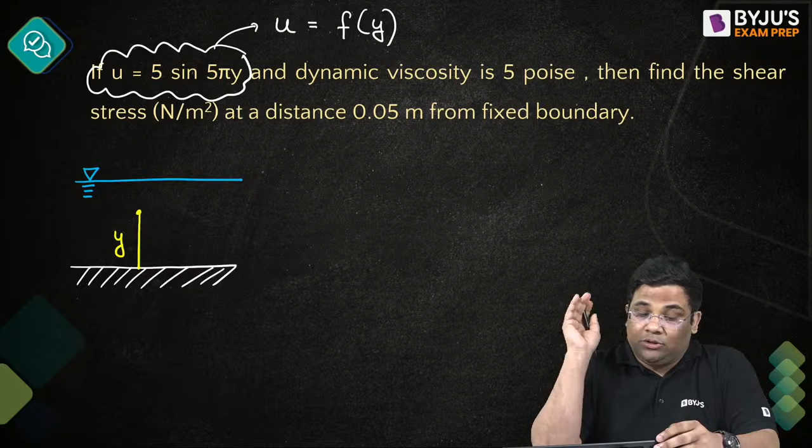Let us start the question. So this is the first question. U is given, meaning the velocity equation is given, and U is a function of Y. If we have a fixed boundary like this, and there is fluid motion, we are seeing the velocity at a distance Y from this fixed boundary. So Y is the distance from the fixed boundary, and the velocity is a function of this - that particular velocity profile is given. The dynamic viscosity is given as 5 poise. Then we need the shear stress at a distance of 0.05 meter from the fixed boundary.

If the concept is not clear, there are many lectures which are conducted covering this concept already. You can refer to those lectures and then come back to solve these questions.

So Y is equal to 0.05 meter, this Y is given. They are asking for the shear stress. Now what is the equation of shear stress? The equation of shear stress is dynamic viscosity into du by dy. This is the Newtonian law of viscosity. And this U equation is known as the velocity profile. Now the velocity gradient - the profile is already given, so we can find this velocity gradient.

How do we find it? We differentiate du by dy. This is the equation of U, so if I differentiate it, 5 is already there, then I'll differentiate the sine term. The differentiation of sine term is cos term. So this will become 5 cos(5 pi y), and the 5 pi will also appear here - that is the rule of differentiation. This will be du by dy. Now here I'll put y equal to 0.05.

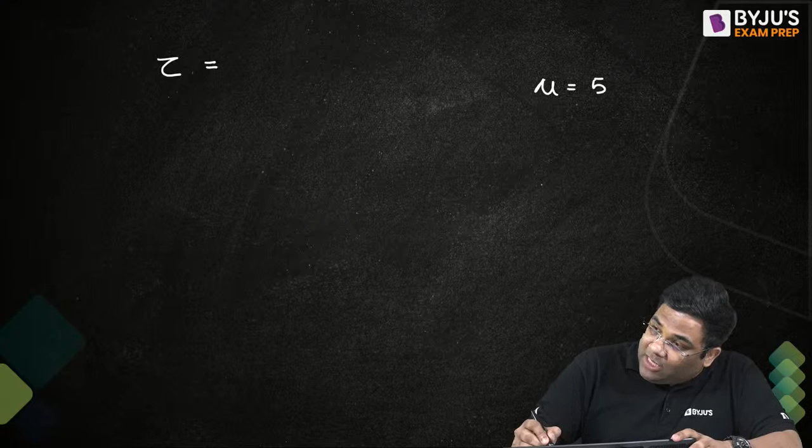The shear stress will be equal to the dynamic viscosity, how much? 5 poise. Now see, 5 poise is how much? If we convert into standard units, it is 0.5 Newton second per meter square. Remember this, that 1 poise is 0.1 Newton second per meter square.

Very good. So this is 0.5, and the velocity profile, how much we got? 25, gradient 25 pi by root 2. Yes, so I can solve this and get the shear stress value, right? Let me solve this: 25 into pi into 0.5 divided by root 2. I'm getting...

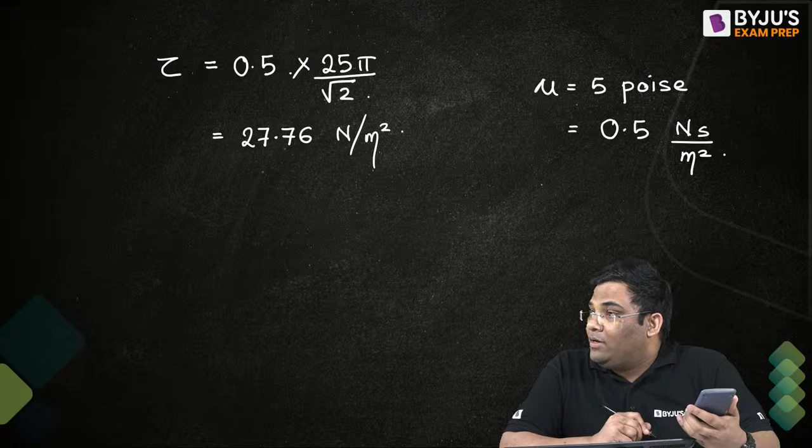27.76 Newton per meter square. So yes, Nikki has got 27.75. Some other students solved, but somehow some mistake happened. That is fine, you are learning, no problem. Yes, so we understood how to solve this question.

So in this GATE examination, this is a very standard question. What they will give? They will give you the function of u. Yes, so if they give the function of u, you can always find out du by dy. See, here it is a trigonometric function, it can be an exponential function, it can be an algebraic function, right? Any function they will give. So you can always differentiate it and put the value of y given.

Now once you find this, the shear stress will be simply dynamic viscosity into du by dy. Okay.

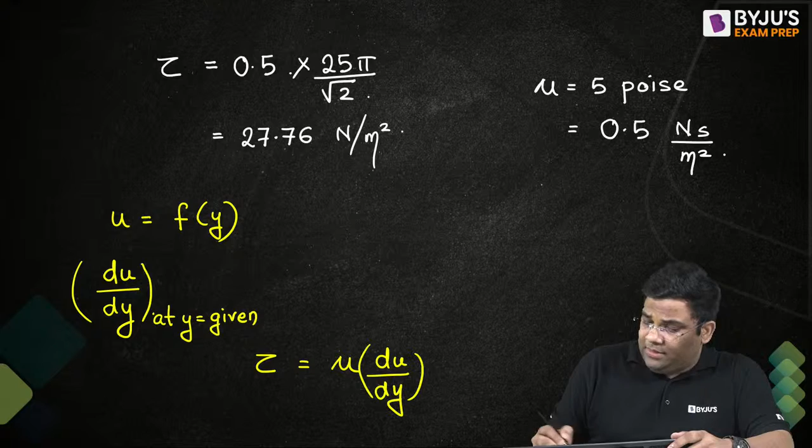Okay, so first question is over. Let us go to second question. Okay, the second question is from viscosity only. This is from viscosity. It's a standard question which they ask a lot.

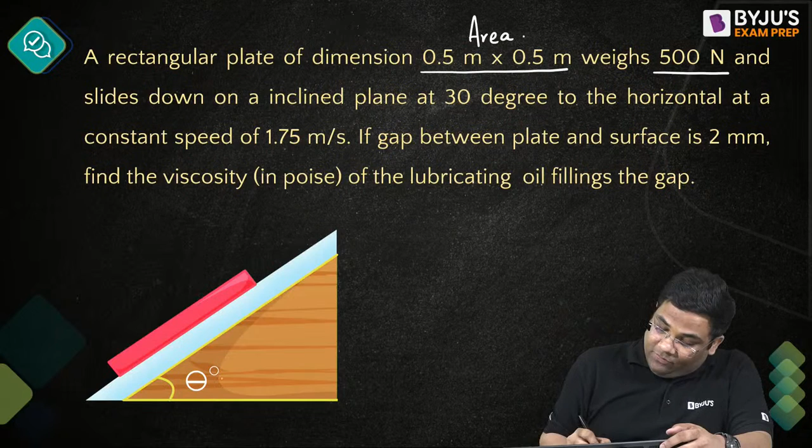So a rectangular plate is there. The dimensions are given, this means this is the area, right? Then the weight is given. And also it is on an inclined plane making 30 degree to the horizontal. And the particular plate is sliding down with a particular velocity.

That velocity is given as 1.75 meter per second. Now this particular gap, yes, there is a gap because there is a fluid. On this particular inclined plane, there is a fluid, and on top of that, there is a plate. Now this gap is filled with a fluid, we can say like that. It is 2 mm, and here this fluid is an oil.

It's an oil, and this oil will have a particular viscosity mu. We don't know, that is not given, but we can find out, and that is what is asked here. Now what is the theory behind it? Let us put some light on what's the theory behind it.

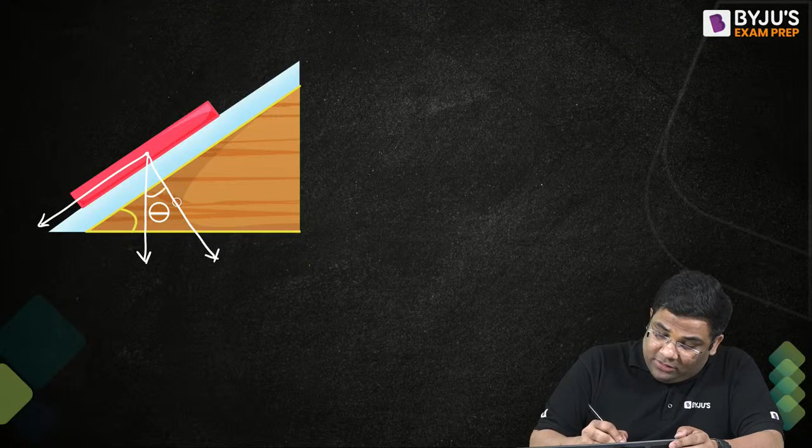Now, if this particular plate is sliding down, why is it sliding down? Because there is weight, yes, and there will be weight components. If this is theta, this is also theta. And I can say if this is W, the weight, this will be W cos theta, and this will be W sin theta. So due to this particular weight component, this particular plate will slide down at a velocity v.

At a velocity v. Now we know that the Newtonian equation of shear stress is: shear stress is equal to mu into du by dy.

Du by dy. So what is du by dy? Du by dy is equal to the change in...

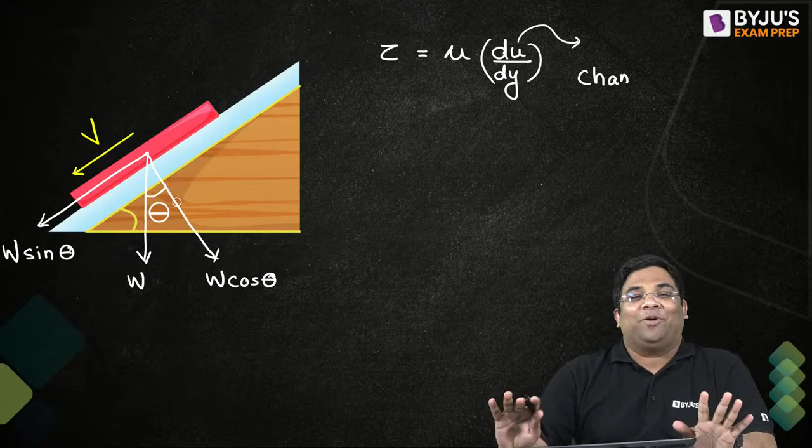Sir, are you using a tablet or laptop to draw diagrams? How does it matter to you? You have come to see whether I am using a tablet or laptop. How does it matter? You are here to investigate that, or you are here to learn the lesson.

So this is change in velocity by change in distance. This is change in velocity by change in distance. Yes, dy is change in distance, du is change in velocity, right?

Now see, if you see a fluid particle here, it is attached to the plate. So it will be moving also at speed v, because it is attached to the plate.

Now a particular fluid particle which is here, attached to the inclined surface, that inclined surface is at rest. So the fluid particle there will have velocity 0. So here the fluid particle has velocity v, and at the other point velocity 0. So the change in velocity is v minus 0.

Now change in distance is how much? Change in distance is this one, right? Suppose I call it h. So change in distance is h, right? So dy is equal to h only.

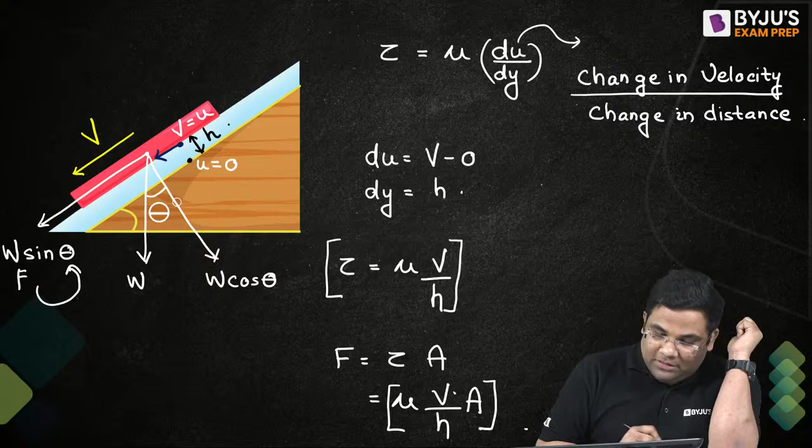So I can say the expression is: the force w sine theta, which is responsible for movement of this particular plate, I will equate to shear stress into area, that is mu into v by h into area.

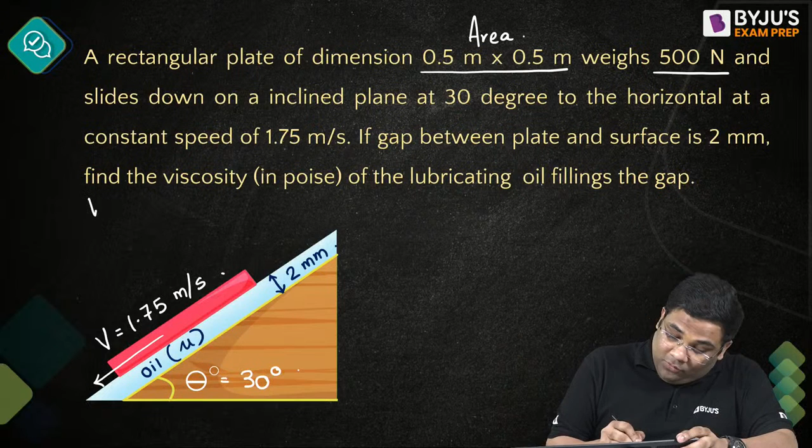Now we'll use this expression and I will solve this question. So w sine theta will be equal to mu v by h into area. See, area is 0.5 into 0.5, that is 0.25 meter square, this is your area. This is velocity of the plate given.

Now h, the gap is given how much? 2 mm. This is h. So I'll convert into meter. So 2 into 10 power minus 3 meter.

Everything I'm converting into meter. Now W is also given, 500 Newton. So this is W, right?

So if you put all these values, can you give me the value of mu now? Put all these values and give me the value of mu. Solve this.

And since everything is in standard units, I'll get the value of mu in Newton second per meter square. So put these values. From here I can say mu will be W sine theta into H by V into A.

So put all these values and give me the value of mu. Let me see who is solving first.

1.1114... 1.114 you are getting, very good. So you are getting 1.143, I can say, right? 1.143 you are getting. Okay.

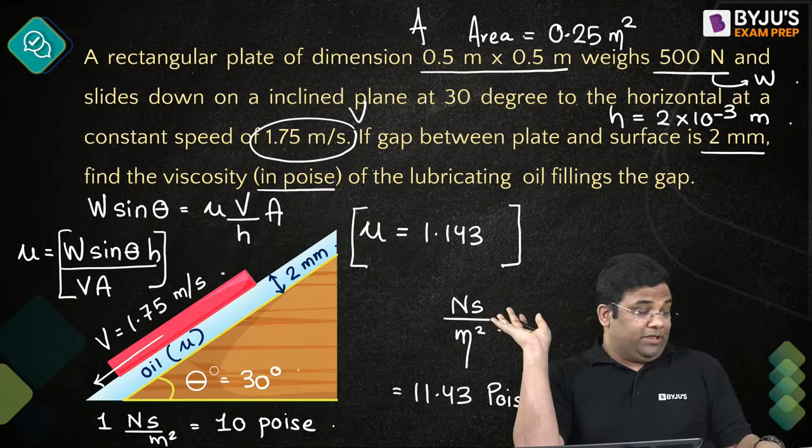And you see in this equation, they have asked you the viscosity. They might give you the viscosity and ask you the weight. Yes, they might give you the weight, they might ask you the velocity. They might give the velocity, they might ask you H. They might ask you area, they might ask you anything. They might even ask you the inclination of the inclined surface.

Okay, so this is another question from viscosity. Let's go to the next question. Question number 3. Let us go to question number 3. And question number 3 is from manometry.

Okay, so this is a point A. This is a point A. And this is a point B. Okay, so the pressure at A is given as 1.05 kgf per centimeter square.

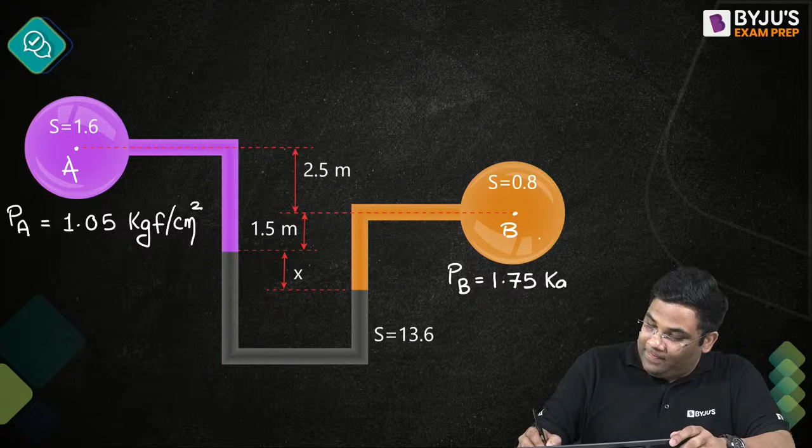Okay, and what is asked? You have to find this x. You have to find this x. Now how to find this x? Very easy. In manometry, I will give you one hint or tip I can give.

In manometry, when you are solving any question, okay, remember two things. The first principle of manometry is that the pressure at same level in same fluid is same. That means you take this level. You take this level. And suppose I am taking 2 points here.

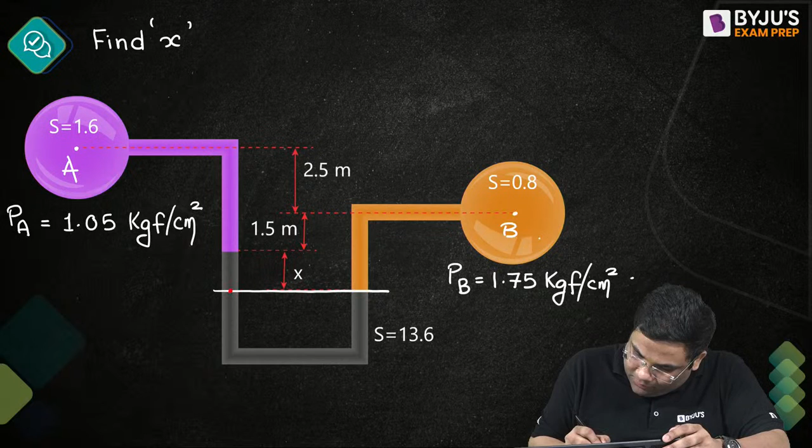Suppose I am taking 2 points here. Suppose this is point number 1 and this is point number 2. Now you can clearly see that these 2 points are at same level. Suppose this point is M and this point is N. So these 2 points are at same level. Very good. And they are in the same fluid.

You can see they are in the same fluid, this black fluid. This black fluid which is having specific gravity of how much? 13.6, right? Yes. So this 13.6 is specific gravity of mercury, right? Yes. So I can say this M and N.

Okay, this M and N is in mercury, okay, black mercury. And therefore I can say the pressure at M will be equal to the pressure at N. So this is an important conclusion we should always remember. Now the pressure at M is equal to the pressure at N.

No problem, very good. Now how to reach to this point M? You see, we can go from this point M from A level, right? You see, this is the level and here the pressure is PA. Now when you go below, or we can say down a particular fluid, the pressure will increase.

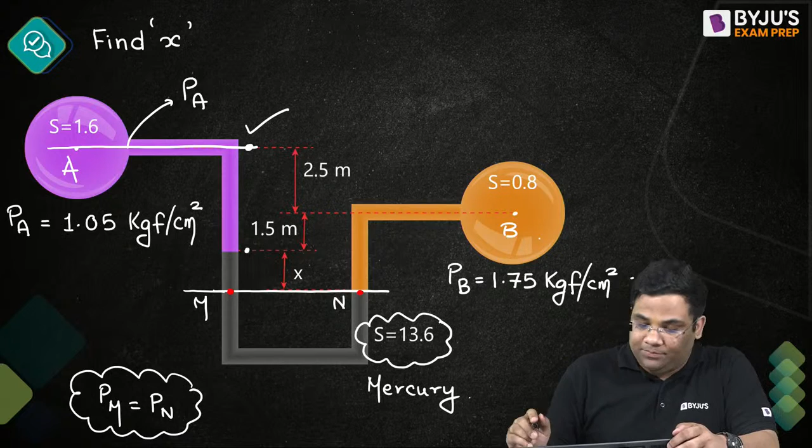You can see that if you want to go from this point to this point, here pressure will be same because same level, right? So if I want to find out the pressure here, what I have to do? I have to take this distance into consideration. That is how much?

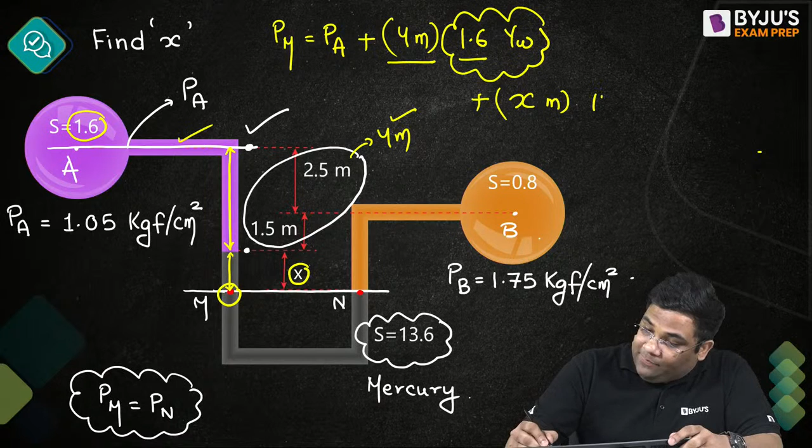Then we have X meters of this black fluid, mercury. So there will be further increase. The H is X meters, and what is the gamma of mercury? This will be 13.6, the specific gravity into gamma W. This will give me the pressure at M. Understood how I'm finding the pressure at M? Very easy - pressure at A, then this increment and this increment.

Now coming to the pressure at N. How to find out the pressure at N? Very easy. For that I will go from this side, B. At this level the pressure will be same, so this is pressure at B. Now from B to N, if I want to go, I will go this much distance down. This I can say is 1.5 plus X.

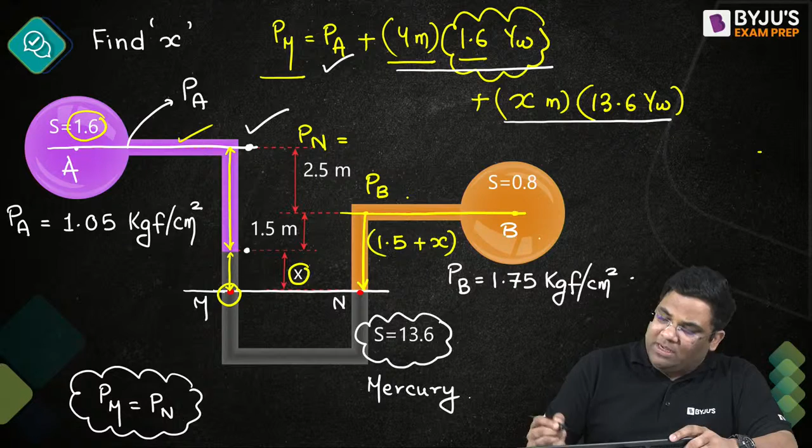This 1.5 plus X, and the fluid density is 0.8. So I can say that Pn is equal to Pb plus the depth, which is 1.5 plus X, and the gamma of the fluid is specific gravity into gamma W.

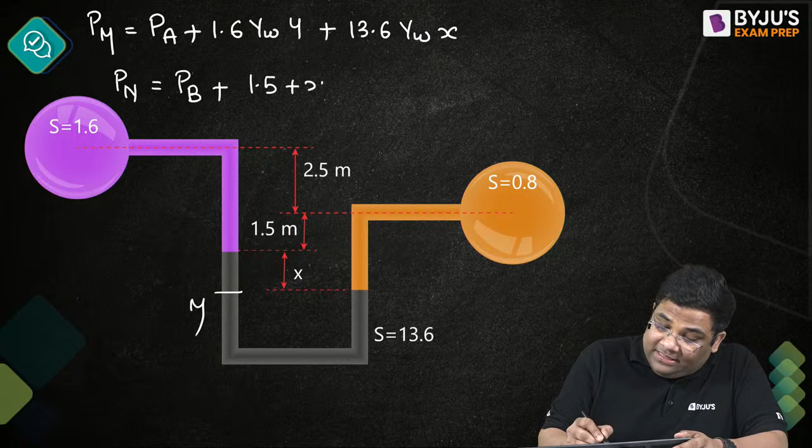Yes, so these two pressure expressions I found out. So I'll write this down again: Pm and Pn. Pm is equal to Pa plus 1.6 gamma W into 4, plus 13.6 gamma W into X. And this is equal to Pn, which is equal to Pb plus 1.5 plus X, then 0.8 into gamma W.

I can open this bracket. This will be Pb plus 1.5 into 0.8, which will give 1.2 gamma W. And then plus, I will get 0.8X gamma W.

Now see, I told that M and N are at the same level, in the same fluid, so these two pressures will be same. So let us equate both of them. If I equate this expression and this expression, I can equate.

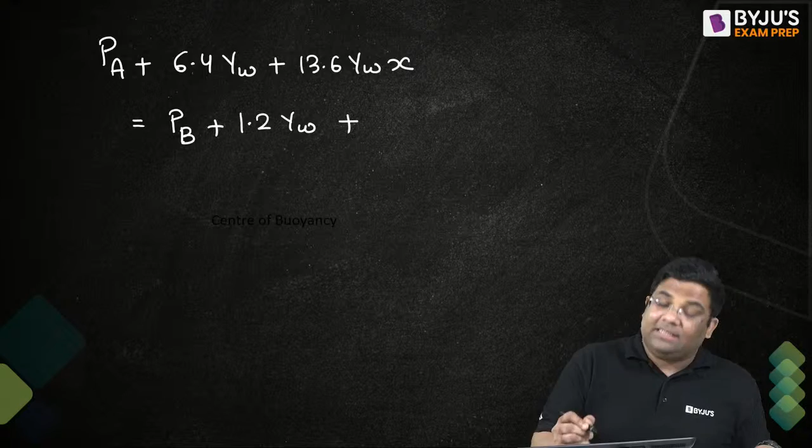So I can say Pa plus, this 1.6 into 4 is 6.4, so 6.4 gamma W plus 13.6 gamma W into X is equal to Pb plus 1.2 gamma W plus 0.8X gamma W. Now I will take these two terms to this side and this term to that side because I have to find X. So 13.6 minus 0.8 gives me how much?

12.8 X gamma W is equal to PB minus PA, plus 1.2 gamma W, minus 6.4 gamma W. This 1.2 gamma W minus 6.4 gamma W gives minus 5.2 gamma W. Easy, this much everybody understood. So now I can easily find X, but I need this PB minus PA.

That was given initially, right? PB was given as 1.75 kgf per centimeter square, and PA is given as 1.05 kgf per centimeter square. Now, PB minus PA, can I say it is 0.7? Yes, it is 0.7 kgf per centimeter square.

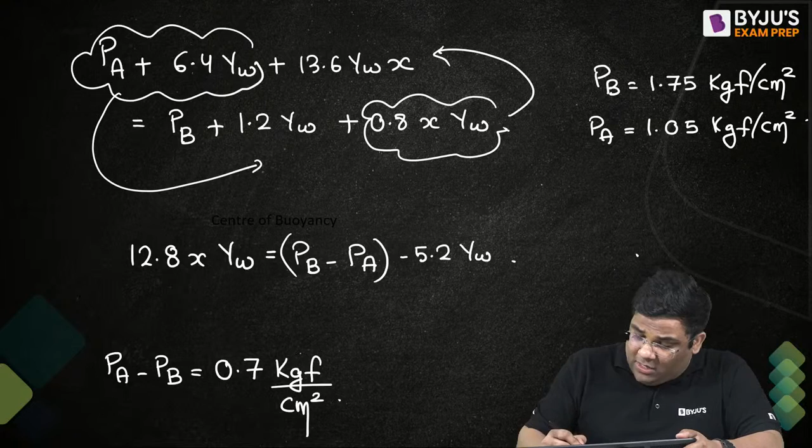Now what is this kgf per centimeter square? Kg force is the force exerted by 1 kg. So what is the weight of 1 kg? That will be 1 kg into 9.81 meter per second square, that is mg, mass into acceleration due to gravity. So this is the force due to 1 kg mass.

mg. So this divided by, this kg meter per second square is how much? That is 1 Newton, right? Then divided by centimeter square. Now 1 centimeter square is 10 to the power minus 4 meter square. So if I take this up, I get 10 to the power 4. So 9.8 into 10 to the power 4 Newton.

Now this can be written as 10 kilonewton, since 10 to the power 4 can be written as 10 into 10 to the power 3, so it becomes kilonewton. Now this 9.8 is actually gamma W, right? Very good, Karthikeya, it's gamma W. So I can say this, 1 kgf per centimeter square, is nothing but 10 gamma W kilonewton per meter square.

Now why am I converting to kilonewton per meter square? Because everything should be in standard units, that's what I'm converting. Very good, very nice. So now I'll erase this. So this PB minus PA, if I subtract, I am getting 0.7 kgf per centimeter square.

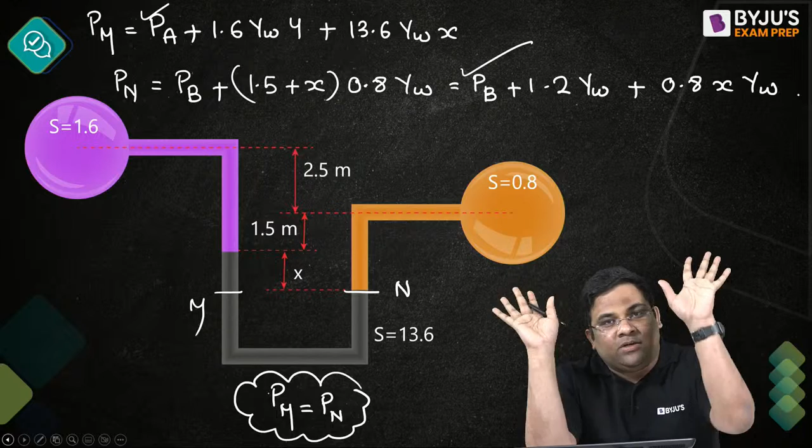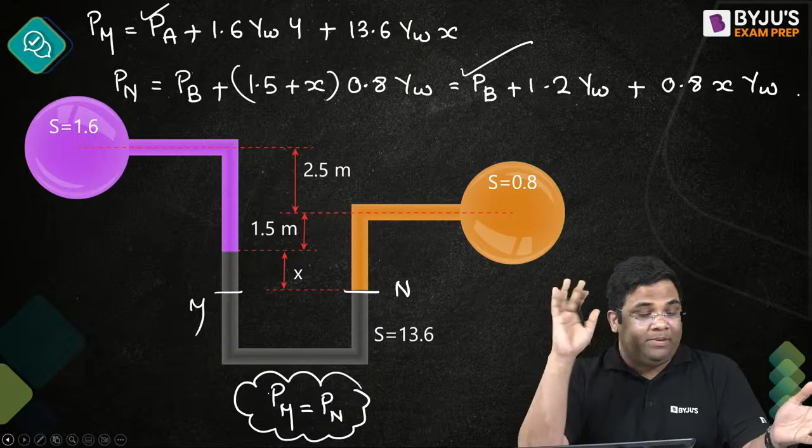Write it down on a piece of paper, paste it on your walls. You cannot crack GATE or get a good rank in GATE by just collecting some PDFs. You have to understand the concepts. Like this in fluid mechanics, there will be 500 concepts, this is just one of them. You have to understand them from an experienced teacher like this, otherwise you can study yourself, you will also crack it. You have to open the books and study from there, that is also a good source. But by collecting PDFs from here and there, nothing will happen.

Okay, so this question everybody understood. Let us go to the fourth question. So 3 questions are over in 40 minutes. Yes, you can see that the questions for GATE are not going to be easy.

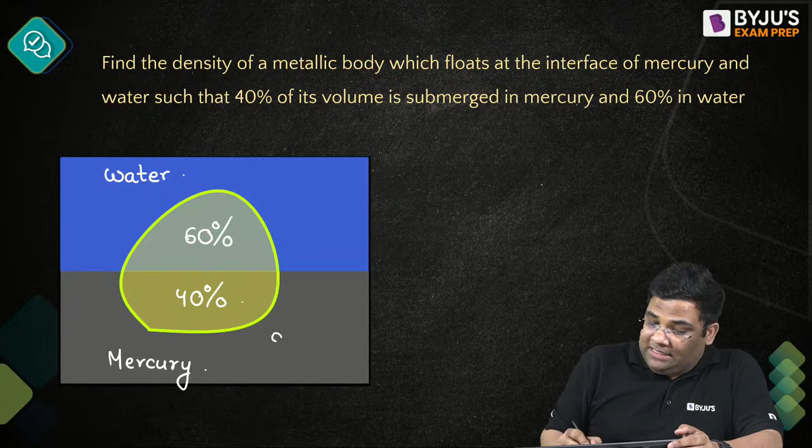Now mercury has a specific gravity of 13.6, and water obviously has a specific gravity of 1, we should know that. Now how to find out the density of this metallic body? Let us see how to find out.

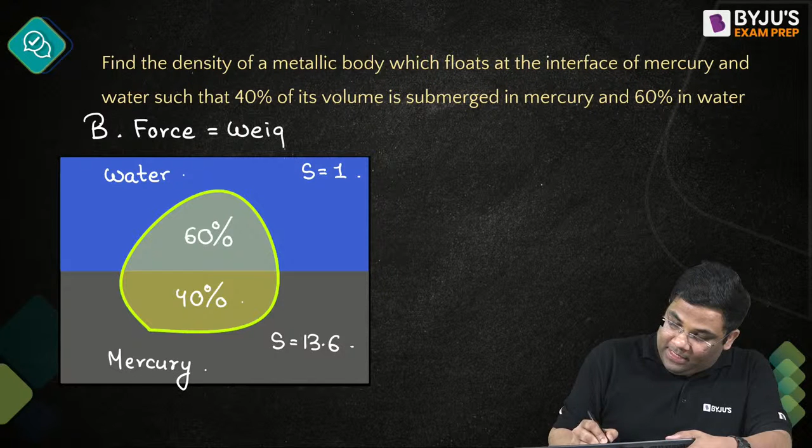Very easy, this can be solved by Archimedes principle. Now what is Archimedes principle? The Archimedes principle is that the buoyant force is equal to the weight of fluid displaced.

Now see, this kind of question you cannot just solve by flukes. Don't imagine this to be some kind of easy exam. This is serious GATE, so don't think you can just solve these questions by fluke. You need proper conceptual clarity to solve these questions.

So the buoyant force is equal to the weight of fluid displaced. Now how much fluid will be displaced? Whatever is the volume of this metallic body, that much fluid will be displaced. But there are two fluids. Suppose total volume of the metallic body is V.

So I can say that in the water there is 0.6V, and in the mercury there is 0.4V. Now I can say how much water is displaced: 0.6V of water is displaced. And how much mercury is displaced: 0.4V of mercury is displaced.

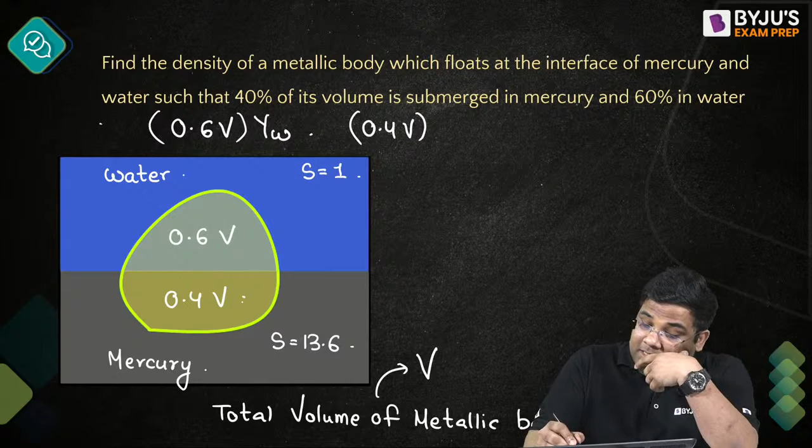So now if I want to find out the weight of this fluid displaced: first, 0.6V of water is displaced, so what will be the weight of this much water? The volume into the unit weight of water. So I can say this is the buoyant force due to the volume of water displaced. Now what is the buoyant force due to the volume of mercury displaced? That will be 0.4V into the unit weight of mercury. Now mercury will have how much unit weight? The specific gravity into unit weight of water.

So I can say these are the buoyant forces, this is the first part and this is the second part. So the total buoyant force is this. Now buoyant force acts upwards, so this is the buoyant force in the first part and the buoyant force in the second part.

Now this particular buoyant force will be balanced by the weight of this particular body. Now what is the weight of this body? The weight of this metallic body will be its total volume into the unit weight of this metallic body, and the unit weight of this metallic body will be its specific gravity, which I don't know, into gamma W.

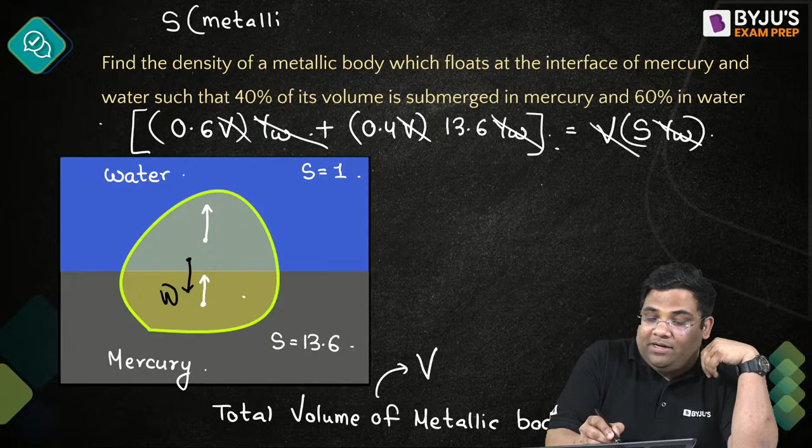Now you can easily solve this question. Gamma W gets cancelled, V gets cancelled. Now can you give me the specific gravity of this metallic body? Tell me, what's the answer? What is the specific gravity of the metallic body you are getting? Many people have solved and answered correctly. Very good, Kiran. Very good, Rishabh Goyal. What is the specific gravity of this metallic body? Tell me, how much are you getting?

6.04. Very good, you are getting 6.04. So now they have asked the density. If they are asking density in kilogram per meter cube, we can find the density of that particular metallic body as 6.04 into 1000, because water's density is 1000 kilogram per meter cube. So I'll get 6040 kg per meter cube.

If they ask you in kilonewton per meter cube, then it will be 6.04 into 9.81 kilonewton per meter cube. So how much will we get this? Let us find out this.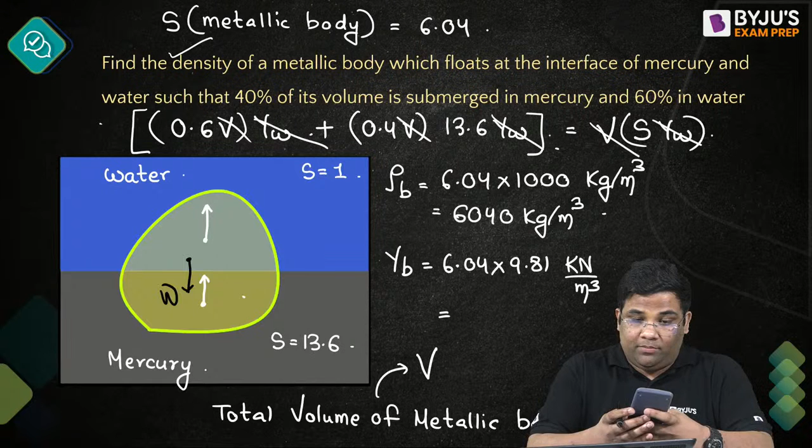Very good, Mamta. Many students have found very good, great. Thank you for your patient hearing and attending the lectures very sincerely. Thank you very much. Newton per meter cube.

So we can say that we can solve this type of questions by using the simple concept of buoyancy. Let us go to the next question, fifth question. Let us go to boundary layer and drag coefficient.

So drag coefficient is asked. What is drag coefficient? It is CD. How to find out this drag coefficient? We have a laminar boundary layer whose thickness is given as delta equal to 6 mm.

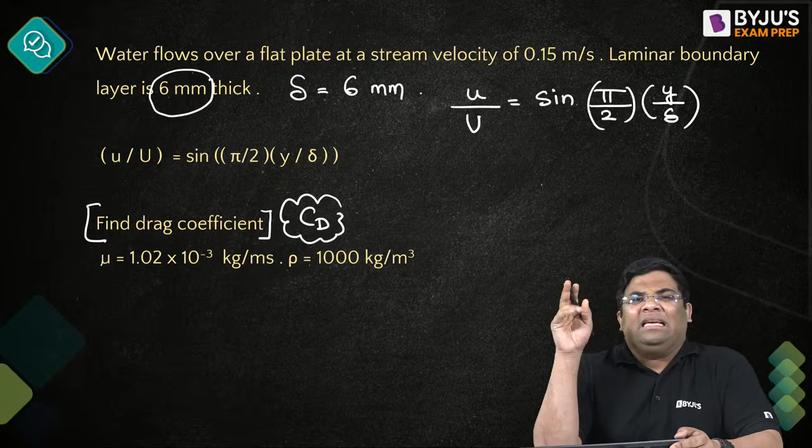And the velocity profile is given as u by U equal to sine of pi by 2 into y by delta. What is y? Y is the distance from the fixed boundary.

So from here we get this relationship. What is this capital U? It is the stream velocity, how much? 0.15 meter per second. And u is the velocity at different distances from the fixed boundary. So this is given. Now I can find out the boundary stress.

Why am I finding the boundary stress? Because we know this relationship: boundary stress is half the drag coefficient into the density into U square. This is the expression, right? So if I can find out the boundary stress, this is what the boundary stress is.

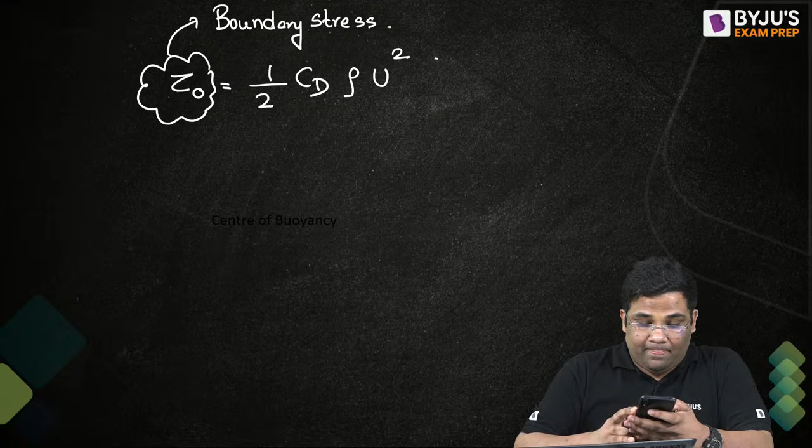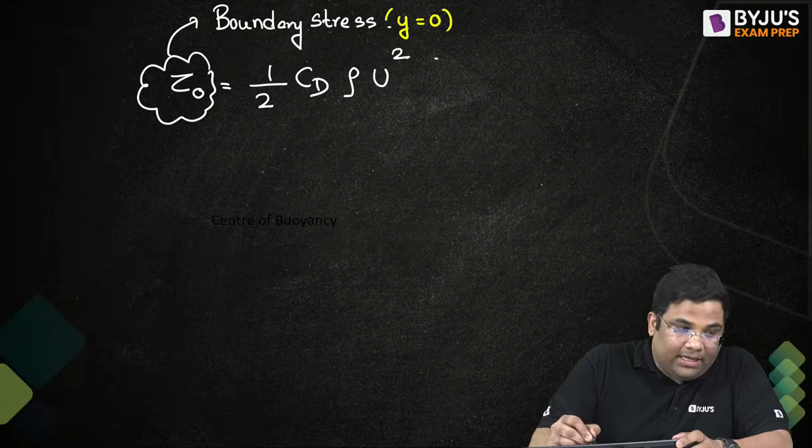Boundary stress means what? What will be the value of y at the boundary? Come on, tell me. What will be the value of y at boundary? Very good, Ganesh. So it will be 0. I can say at y is equal to 0. So if I can find out the boundary stress, then I can find out this drag coefficient.

Drag coefficient is boundary stress by half of rho U square. So I have to find out this boundary stress. Now how will we find boundary stress? We know this equation, mu into du by dy. Mu is given to us, very good. Du by dy you can always find out, since this is the expression of u.

So if you differentiate this, what do you get? Capital U. When I differentiate this sine, I get cos, and pi by 2 delta will come out. Then I'll get cos of pi by 2 into y by delta. So this will be du by dy. Now we are interested in finding the boundary stress, so I'll take y is equal to 0.

If I take y is equal to 0, it will become cos 0. What is cos 0? Cos 0 is 1, na? So I'll get this as 1. And this velocity gradient I will get as capital U into pi by 2 delta. Yes, I'll get this expression.

Very good. Now I have got this expression. I can put it here and find out mu, which is 1.02 into 10 to the power minus 3. And then you put this value of U. Y will not come since you are differentiating with respect to y. Sorry, it will be pi by 2.

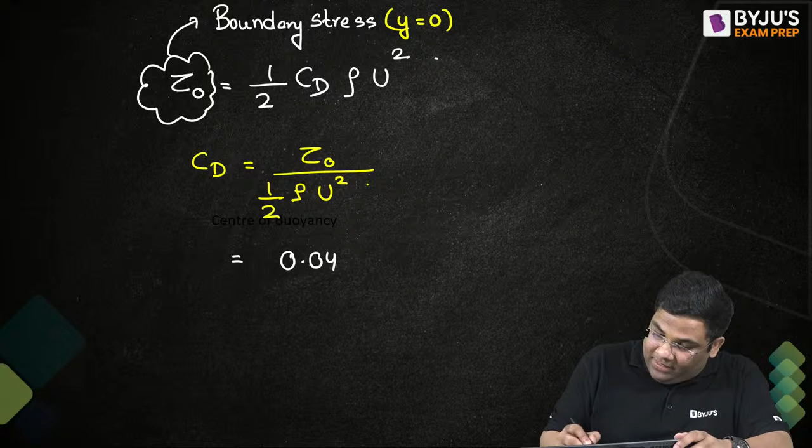So we got the boundary stress, very easy. Now I'll put here and get the expression. So it is 0.04 Newton per meter square, half. Everything I'll put in SI units, so 1000, okay. And u is given 0.15 whole square. If you solve this, as our dear Rishabh has found out, we get around 3.56 times 10 to the power minus 3. This is the drag coefficient. Let me just take the value... yeah, almost we are getting this value, right?

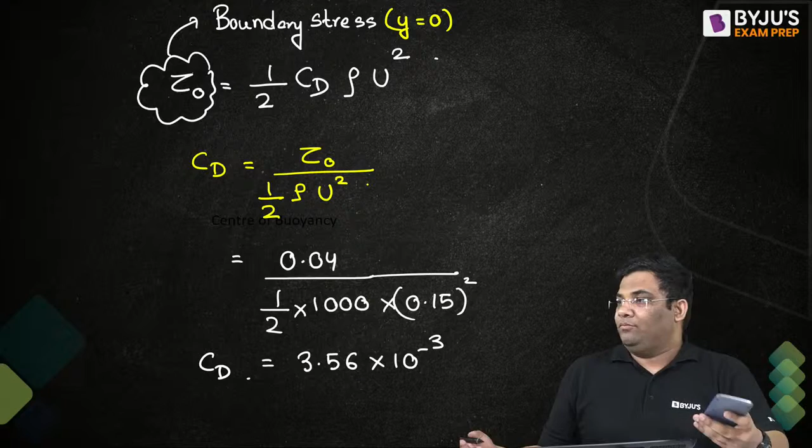Understood? A question on boundary layer theory, easy. So let's go to the next question. Question number 6, another question on boundary layer theory. So many students have got it, very good, those students are finding the answers, that's great. Now we have a viscous laminar flow, and we have a laminar boundary.

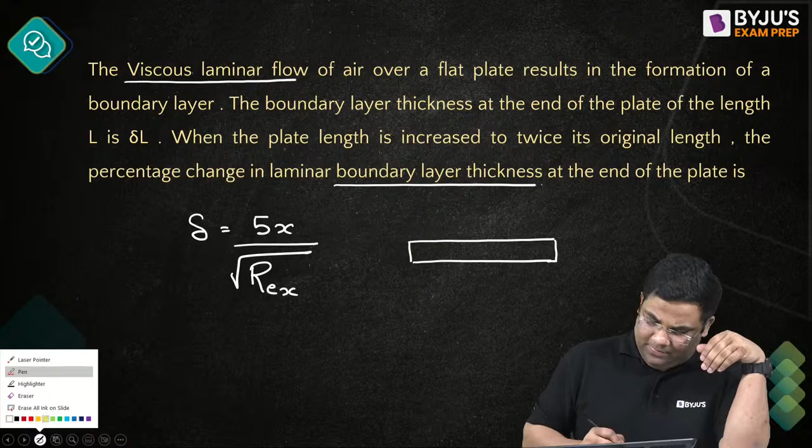In laminar boundary flow, if we try to find the boundary layer thickness, what is the expression? It is 5x by root under Rex. Suppose this is your fixed plate, and the laminar boundary layer is formed like this. If you take at distance x, this is the Reynolds number. Reynolds number is root under rho v, and then x by mu.

So you see, this is root x in the denominator and x in the numerator. So can I say that if other factors are same, suppose v is same, mu is same, can I say this boundary layer thickness will be directly proportional to root x? It's a very important conclusion you should know: this boundary layer thickness is directly proportional to root x.

So now, at a particular length L, the thickness is delta L. When the plate length is increased to twice its original length, what is the percentage change in the boundary layer thickness? Very easy. Since the boundary layer thickness is directly proportional to root x, I can say delta 1 by delta 2 will be root under x1 by root under x2.

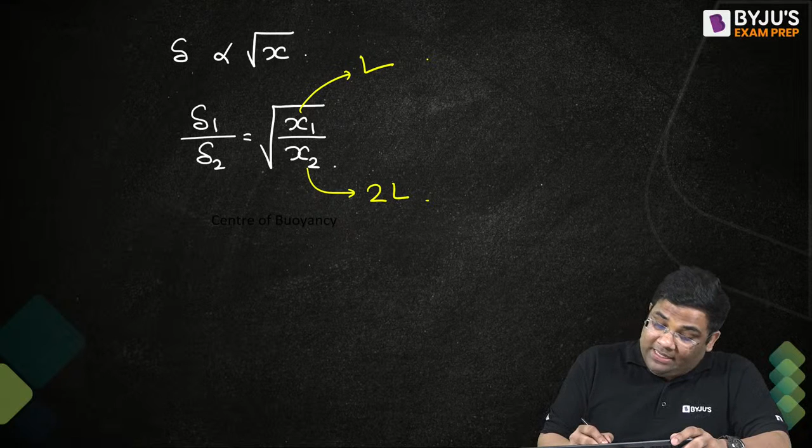So initially the length of the plate is L, now it is 2L, it became twice. So delta 1 by delta 2 equals 1 by root 2, or delta 2 equals root 2 times delta 1. And the percentage increase in the boundary layer thickness will be delta 2 minus delta 1, divided by delta 1, because originally it was delta 1 and it increased to delta 2, into 100.

So this is root 2 delta 1 minus delta 1, by delta 1, into 100. So how much do I get? I get 41.4%. Okay, and many questions, very good, very good Rishabh.

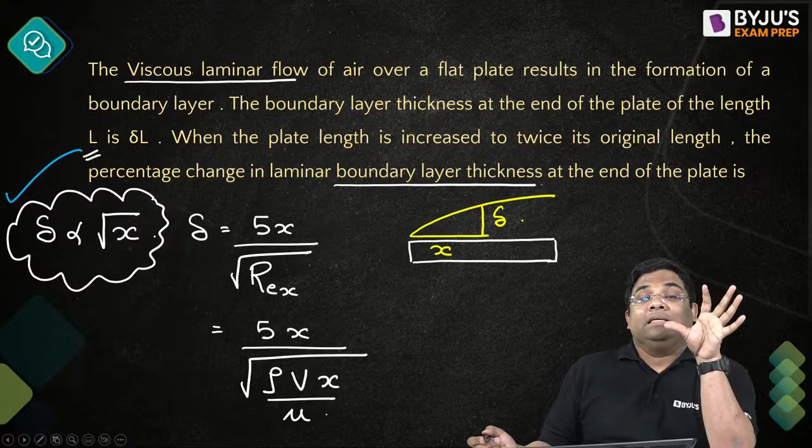And Ganesh, I'm happy that you all are seriously studying and solving the questions. Please continue such good work, you will have a great future. So this is the boundary layer, a very important concept which we use in solving numericals. Very good, let us see the next thing.

Question number 7, okay, something on fluid kinematics also. This question is number 4. In incompressible flow, what should be the value of lambda? If you use the continuity equation in incompressible flow, what is the continuity equation?

The differentiation of u with respect to x, plus differentiation of v with respect to y, plus differentiation of w with respect to z is equal to 0. Now it is a 2D flow only, because only u and v are mentioned here, so I can say this term is 0.

Now differentiate this u with respect to x. What do you get? The first term will be lambda into y cube, differentiating with respect to x. The second term will be minus 2xy.

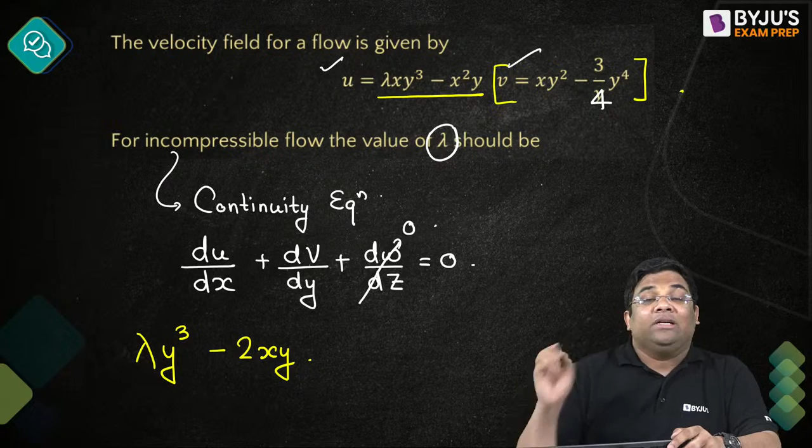Now consider dv by dy. Differentiate it with respect to y, what will it be? 2xy. And this term is 3 by 4 y to the power 4, so differentiate it with respect to y, what do you get? 4y cube, so this 4 gets cancelled, and this will be equal to 0.

Very good, Rishabh. So from here, this also gets cancelled. So what do we get? Lambda minus 3 into y cube is equal to 0. Okay, so y equals 0 is trivial, so from here I can say lambda is 3. Understood everyone? Very good.

So this is a question from fluid kinematics. Many students might be thinking about where to solve other questions.

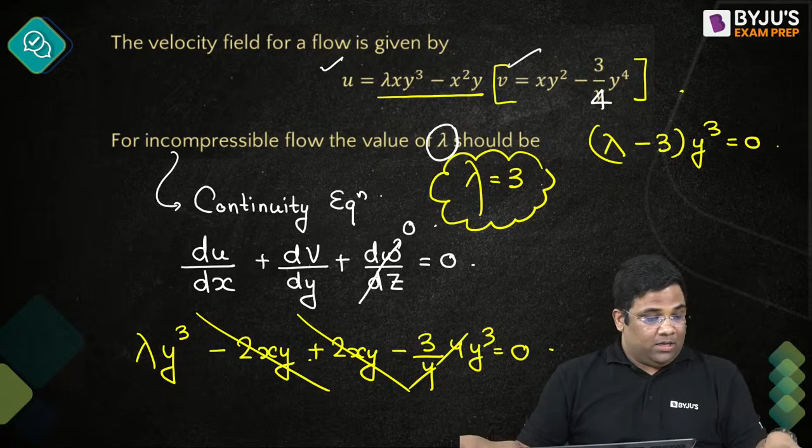Question number 8. So something on what? Let us see something on viscous flow, incompressible flow. Let us see some questions from there where we'll use our Hagen-Poiseuille equation.

So an upward flow of oil is happening, you see. That means the flow is from this point to this point. Suppose this is section 1, this is section 2, so flow is happening from section 1 to section 2.

Density is given, dynamic viscosity is given. It is taking place under laminar conditions in an inclined pipe of given diameter. Suppose this is D. The pressure at point 1 and pressure at point 2 are given to us. Find the discharge in the pipe. It's a very standard question, discharge in the pipe.

Now we can apply Bernoulli between point 1 and point 2. Suppose, if I take the level of point 1 as the datum, can I say Z1 will be equal to 0, because I am taking that as the datum only, right? It will become 0.

Now if I want to find out Z2, suppose this is point 2, so this is Z2, because this is the datum, Z1 is 0. How will I find Z2? Very easy: this distance is given as 5 meters, and this angle is 45 degrees. So I can say Z2 will be 5 by sine 45, or 5 sine 45.

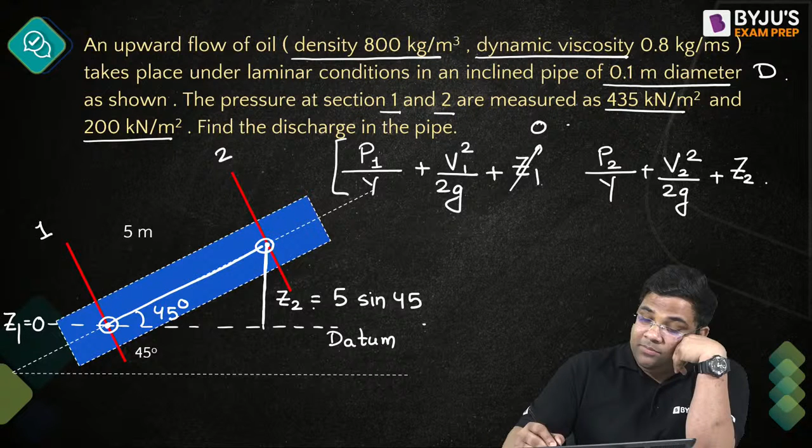Now see, Z1 is 0, so I will take it as 0. Now see, there is no change in cross section, so I can say the velocity will remain same, so V1 is equal to V2. So if you take a difference of this, what will happen? Then this will get cancelled with this one, because V1 is equal to V2, because the discharge will not change, and also the velocity will not change because area is not changing. So these two also will get cancelled.

Okay. Now Z2 we have just got, right? Z2 how much I have got? 5 sine 45. Very good. So I can say that this particular thing will be equal to the total head loss in this particular pipe.

So I can say the total head loss in this particular pipe will be how much? It will be P1 minus P2. P1 is how much? 435. P2 is how much? 200. So I can say P1 minus P2 by gamma, and then minus 5 by root 2.

How this minus 5 by root 2 is coming? Because you see Z2 is what? 5 sine 45 means 5 by root 2. So this is minus, so minus 5 by root 2. Okay, somebody has found the answer. Let us state that is correct or not.

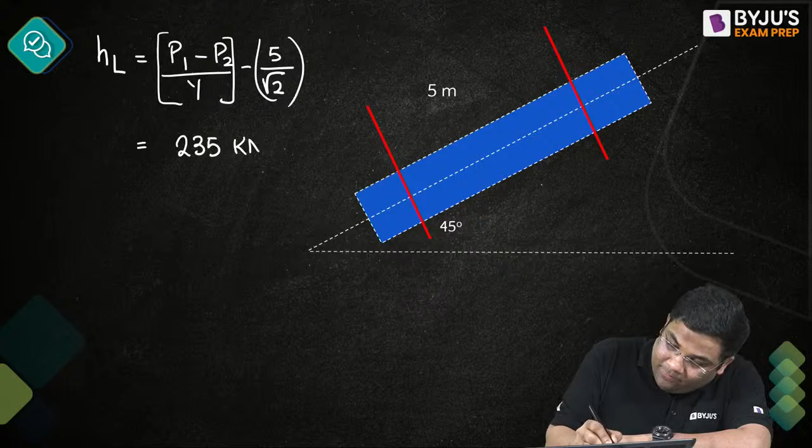Very good. So now P1 minus P2 is how much? 235, right? 235 kilonewton per meter square. Now see, the oil is having density of 800. So I can say that oil has a specific gravity of how much? 0.8. 800 by 1000 is 0.8.

So if I want to get the unit weight, it will be 0.8 into 9.81 kilonewton per meter cube, and then minus 5 by root 2. So what is the total head loss I am getting? Let us find out this. So this will be 235 divided by 9.81 divided by 0.8. So whatever I am getting, I'll subtract 5 divided by root 2. So how much do I get?

25.77. Oh, Rishabh, that's great. Pretty impressed by you. That's great. Very good. Very good. You have got the right answer of discharge.

Yes, this much. Now this head loss I will equate to the equation of head loss, that is 32 mu, the average velocity into L by rho g d square, or I can say gamma d square. Yes, this is the Hagen-Poiseuille equation. So from here I can find out the average velocity. Yes. See, mu is given how much?

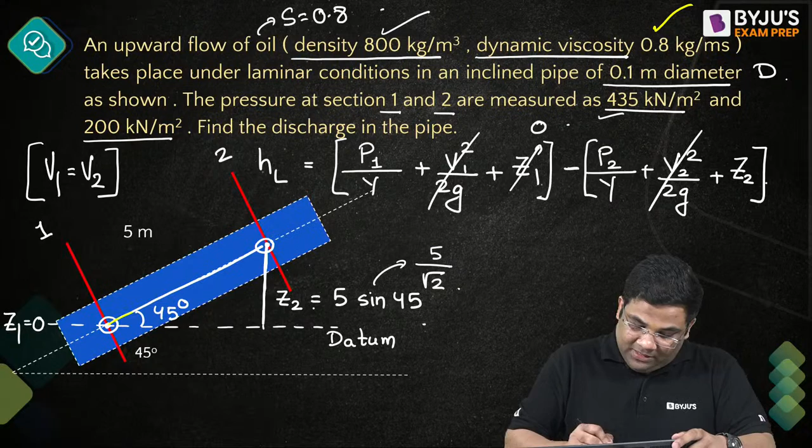Dynamic viscosity 0.8, and then d is given for the pipe 0.1 meter, and then L, length of pipe, is given how much? It is given 5 meter from this point to this point. Okay, let me put these values. I am getting U bar how much? First of all, tell me the average velocity.

From that we'll get the discharge, right? So it will be 26.41. Gamma will be 0.8 into, I can say, I can use this gamma as rho g. Rho will be 800, and g will be 9.81, and then d square 0.1 square divided by 32. Mu is given 0.8 again, and L is given 5 meters. So how much are you getting, U bar, the average velocity?

Good evening, good evening. How much are you getting? 26.41.

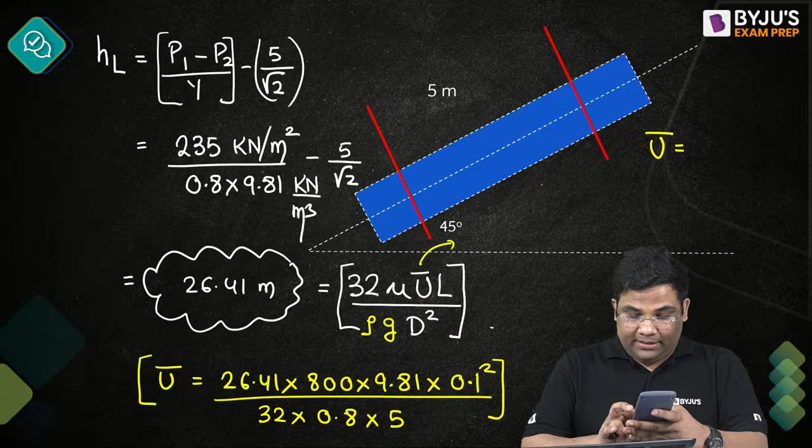Into 800 into 9.81 into 0.1 square divided by 32 divided by 0.8 divided by 5. Okay, 16.19. See, I have chosen a little difficult question, if you see, right?

I have chosen not difficult questions but conceptual questions, because in the GATE 2 mark questions you'll expect this kind of questions. So from now I will be solving slightly better questions, because in the examination they will ask you good questions only, like these, which you cannot solve by just random one or two things. You need to be conceptual, and at the same time you need to know the formula also. So in upcoming times we will be solving such kind of questions.

Very good. So from here I can find out the discharge. Discharge is how much? Pi by 4 into d square, the area, into velocity, right? So we put these values: pi by 4, then 0.1 square, and u is 16.19, I'll get the discharge. So you can see that I have mixed the topics. 3.14 divided by 4 into 0.1 square into 16.19, I'm getting how much? 0.127 meter cube per second, yes.

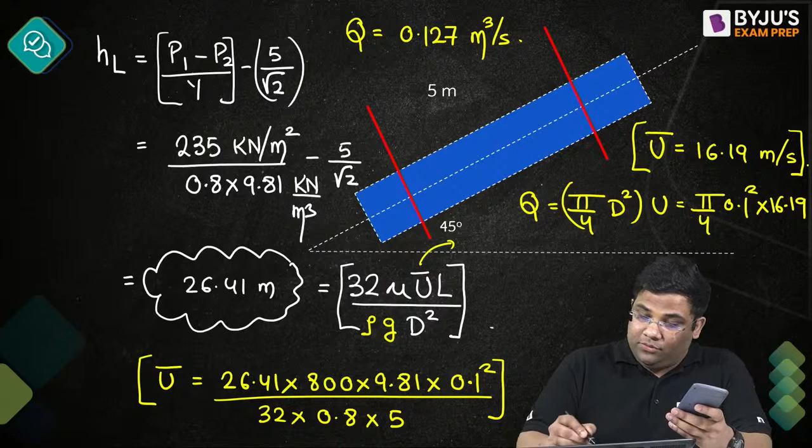Okay, next question, 9th question. Venturi meter is used to find out what? The discharge. And discharge is, with the coefficient of discharge, in Venturi meter equations, remember: A1 into A2, root under 2GH, divided by root under A1 square minus A2 square. That formula is for finding discharge.

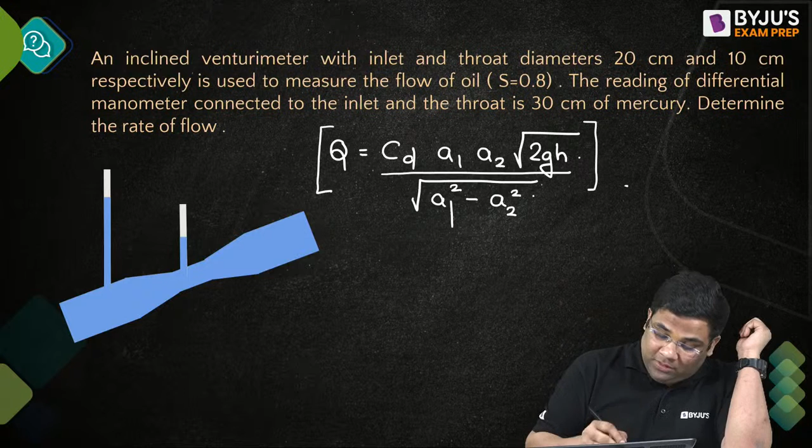Now, this discharge equation is not affected that much even if the Venturi meter is inclined. So suppose this is point 1, and here the area is suppose A1. This is point 2, the throat I can say, here the discharge area is A2. So diameters are given, you see, this is D1 and this is D2. So you can always find out the areas, how much areas we are getting.

When nothing is given about the coefficient of discharge, you should take that as 1. Now what is this H? How to find out the H?

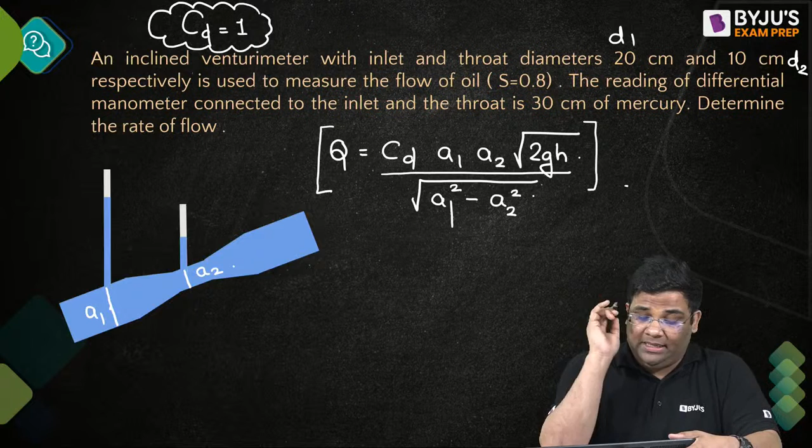If it was only water, I could have directly used this level difference HH. But it's not. We are using a differential manometer. So whenever a differential manometer is used, means actually it will be like this.

And this portion is filled with mercury. Now when this is the case, and this is the difference of levels, how to find out H, the actual head difference? The formula is X into the ratio of the specific gravity of the fluids minus 1. This fluid is mercury, given now 30 centimeters of mercury, so this is mercury. Yes, mercury specific gravity will be 13.6.

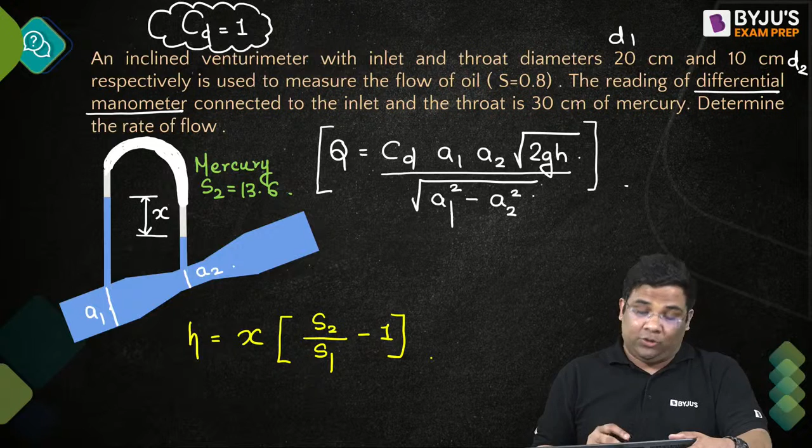And we are measuring a particular oil actually, this is an oil, it is given blue - some oil can be blue also. And this oil has a specific gravity of 0.8. So from this you can actually find out the head difference between point 1 and point 2 by using this equation.

This X is 30 centimeters, so I can take 0.3 meter. Then S2 is 13.6, S1 is 0.8. So how much actual head difference between point 1 and 2 am I getting? Let us see: 13.6 divided by 0.8 minus 1, into 0.3. I am getting how much? 4.8 meter.

Now, rest of the things are very simple calculation. See what will be A1. A1 will be the area at section 1, that will be pi by 4 into diameter square. Diameter is 0.2 square. What will be A2? A2 will be pi by 4 into diameter square. Diameter is 0.1 square. These are A1 and A2, so you can find out A1 and A2, right?

0.0787 meter cube per second. Others are also getting that, but somebody is getting a different answer also, so I have to find out. Otherwise, I can't trust you. I can't trust, but I feel that it is 0.0787. Okay, let me find out.

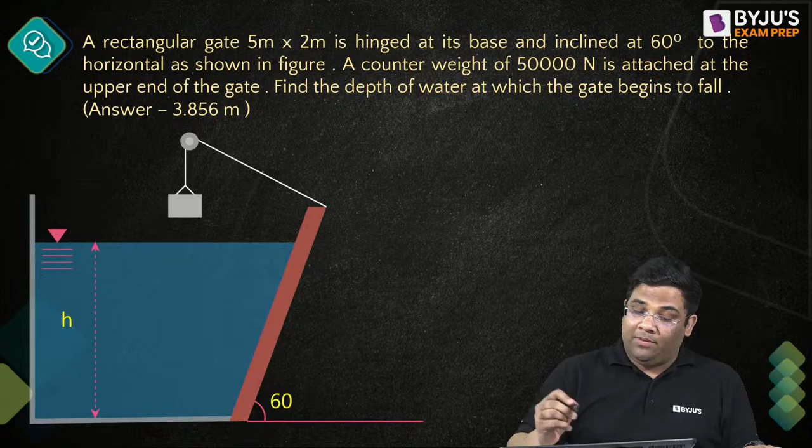See, question number 11, homework, answer is given. You can solve yourself. Question number 12, homework, answer is given. 13, question is given, answer is given. 14, question, answer is given. 15, question, answer is given. Okay, this is from horizontal acceleration, fluid in horizontal acceleration. Then some pipe flow question, answer is given.

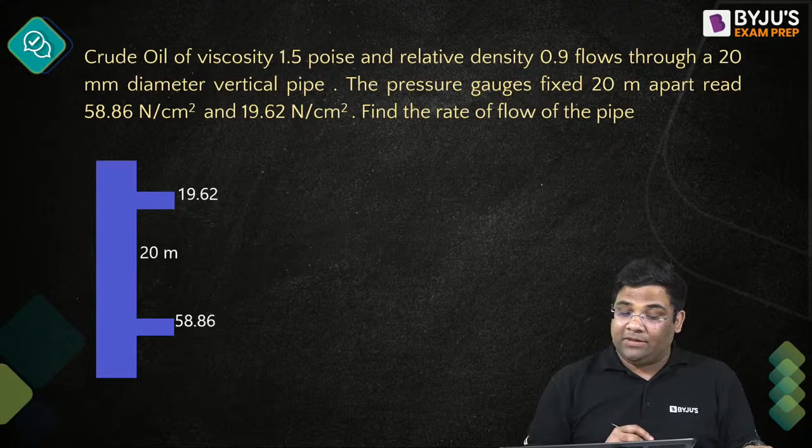Yes, 17 also, question and answer is given. Where is the answer here? Oh, answer is there, yes. And then we have question number 18, okay, manometry, the question answer is given. 19, the question is there, from buoyancy, answer is given. Question number 20, okay, from your acceleration, pressure distribution, when you have accelerating fluid, that answer is also given.

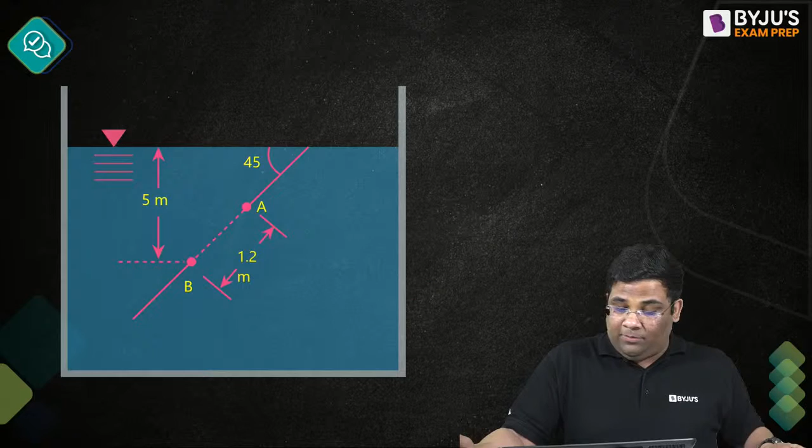Let us solve our last question of the day. Other questions are for your practice, and the answer is given so that you can solve. I had not given the solution, why? Because you have to solve yourself. Na? Everything I have solved in the class, then what will you solve?

Okay, so here it is an inclined rectangular sluice gate AB, 1.2 into 5 meter, as shown in the figure. Okay, it's a gate, it's entirely a gate, to control the discharge of water.

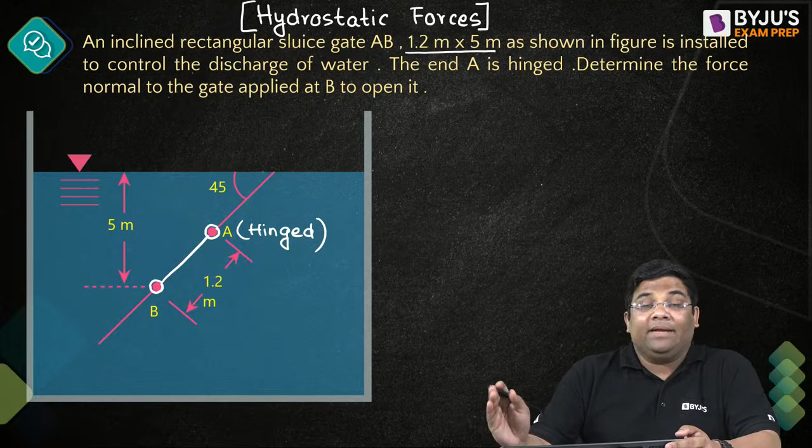Okay, very good, the end A is hinged. So this is hinged, very good. You have to find out the force to be applied normal to the gate at B to open it. Basically, you have to apply a force F here, and since it is hinged about this point, if you apply this force, then it will get lifted like this, right? So open the gate. So if you want to open the gate, you have to apply a force F here. So how much force F you have to apply? That is asked in the question. It is very easy, how to solve this question?

You see, here what will happen? The fluid force will act, the force due to the pressure will act. Suppose that is the pressure, the force due to the pressure of fluid is acting at this point. So I can say that this is point A, yes, this is point B, okay, and then this is the F, okay, and this is what? FP, right? Something like this is given, yes.

Now, it is hinged about this point, so if you want to open it, then this particular force will exert some moment about A, yes. So if you want to open this gate, what do you have to do? You have to apply a force F in such a way that the moment of FP about A will be equal to the moment of F about A. Understood? So when the moments are equal, then it will get opened.

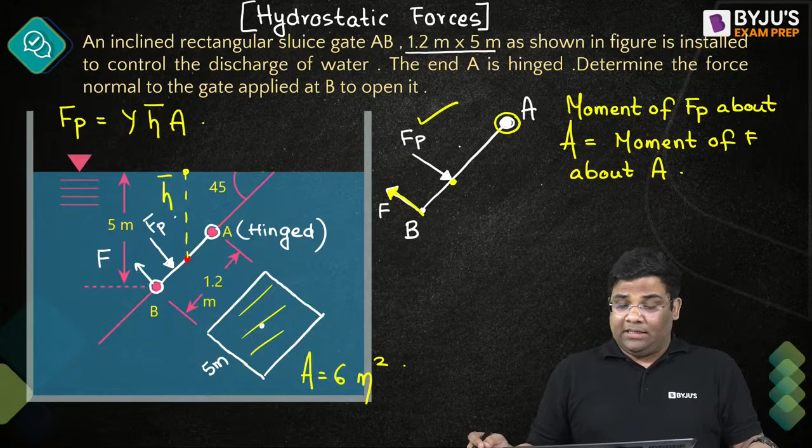Let us solve. Diagram is there. So let us first find out H bar. How to find out H bar? I'll tell you.

You see, this is exactly at the middle. So can I say, suppose this is G point. Can I say this AG will be equal to 0.6? This AG is equal to BG, both. AG is equal to BG is equal to 0.6 because it is exactly at the middle. So it is 0.6 meter.

Okay, now see, this is given as how much? Let me just switch off the phone. It is doing something weird.

Okay, now it will not do that. So this is what? This is, I can say, is your 5 meter given in the question. This is 5 meter. Very good. Now see, this is H bar. This is H bar. Very good.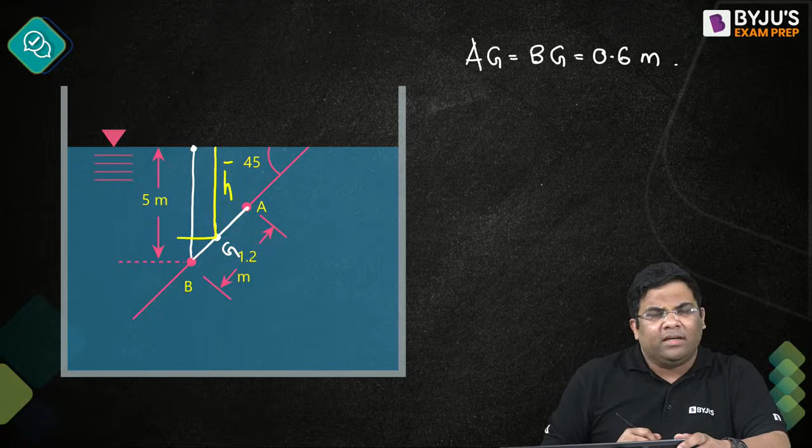Now suppose this point I am calling as O. Very good. Now see this triangle BGO, right? This BG is 0.6 meter. Yes. And this is 45 degree, means this also will be 45 degree.

Yes or no? 45 degree. So can I find out OB? Yes. If this is 0.6, I can say OB will be equal to what? 0.6 into sine 45, right? It will be 0.6 into sine 45. So what will be this value?

This will be 0.6 into sine 45 means 1 by root 2. Why am I getting this? I can say sine 45 will be equal to OB by BG. So 0.6 sine 45. So this will be 0.6 into sine 45, which is 1 by root 2.

So how much am I getting this OB? OB will be equal to 0.6 divided by root 2. I am getting a value of 0.424 meter.

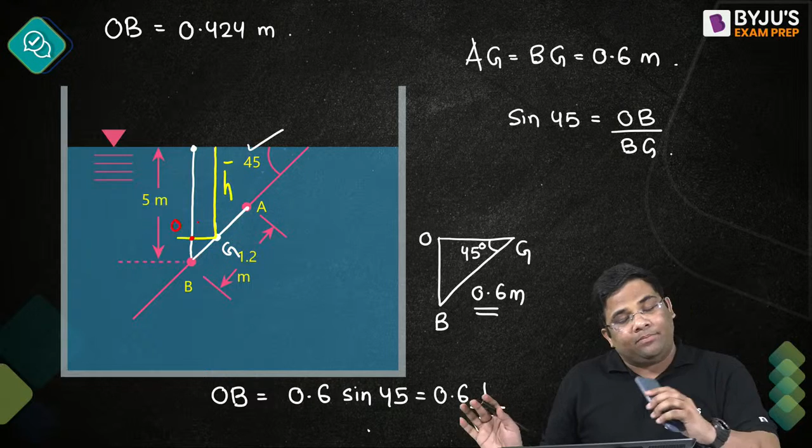Are you people solving with me, or you are sleeping? Slept? Wake up. Okay, now, see this.

Can I say this H bar? If this is H bar, this is also H bar, right? If this is H bar, this to this is also H bar, right? Can I say from this diagram, this H bar is nothing but 5 minus OB?

So how much am I getting this? This I am getting 5 minus 0.424, that is equal to 4.576. So everybody understood how I am getting this H bar, yes?

So how to find out pressure force now? Very easy. This fluid is water, right? This is water. Okay, this is water.

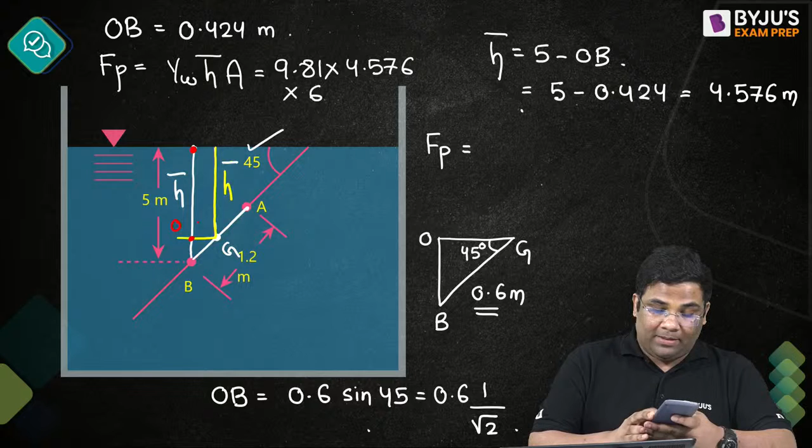So I can say pressure force equals gamma W into H bar into area. Gamma W I can take 9.81, H bar I can take 4.576, and area I will take 6, that is 5 into 1.2. So how much pressure force are you getting? It will be 9.81 into 4.576 into 6, giving a value of 269.34 kilonewton. This is the pressure force.

So you got the pressure force. Very good. So erase these things, we got the pressure force.

But does the pressure force act at the center of gravity? Tell me, where does the pressure force act? Does it act at the center of gravity or some other location? I want to see. Nobody is telling. Why is nobody telling?

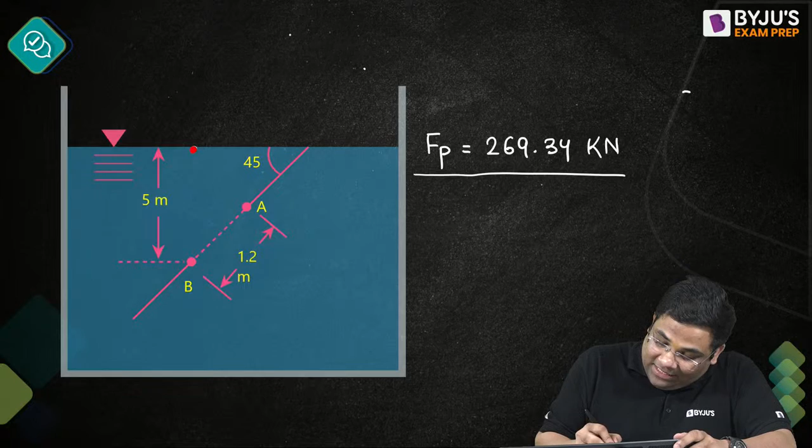Okay, don't know, forgot. It acts at the center of pressure. Okay, but where exactly? The name is center of pressure, so it acts at the center of pressure. And this depth is known as the depth of center of pressure. Now, how to find out this depth of center of pressure?

The depth of center of pressure is actually equal to the depth of center of gravity plus the moment of inertia about the center of gravity into sine square theta, where theta is the angle of inclination of that particular inclined surface, divided by area into H bar. Very good.

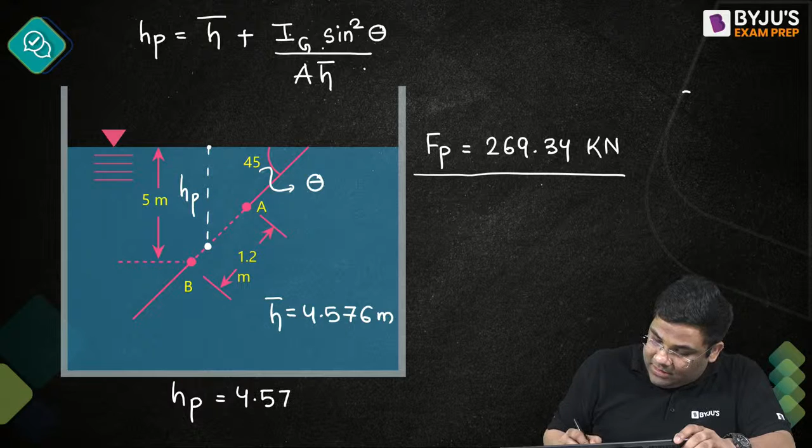Some people have told center of pressure. Okay, very good. Now HP will be equal to H bar. We know H bar we have already got, right? 4.576, very good, that we know. Now what is the moment of inertia of a rectangular area? It is B D cube by 12, right?

So I can say it will be BD cube by 12, sine square 45. Now what is the area of a rectangle? It is B into D. So it is B into D divided by h bar, which is 4.576. Now see what will happen, this B gets cancelled, I get a D square, right? Now D is how much?

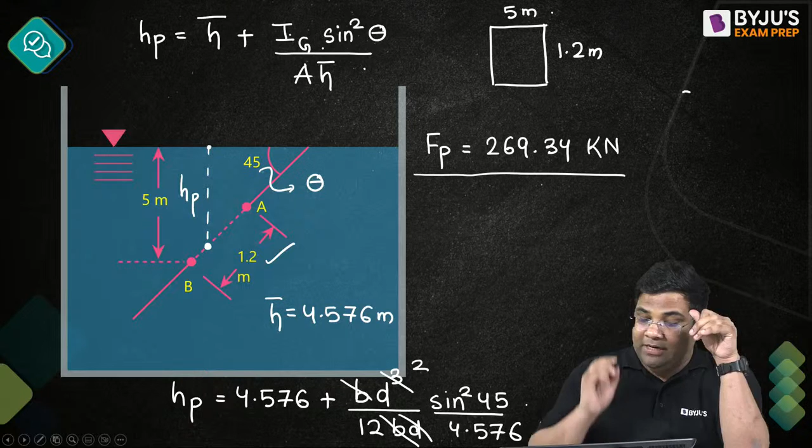It's a rectangular area, right? The D is given as 1.2 meter. Here you see it is 1.2 meter and this is 5 meter. Okay, so take this D in this direction actually. So I can say this is 1.2 meter, square. So how much am I getting this?

Tell me, HP, how much am I getting? Just put the value here, you can eliminate everything. I'll get D square by 12. So I can say this is 1.2 square by 12.

So what is the answer for center of pressure? See, in the examination, they can ask you only the center of pressure also. So what is the depth of center of pressure? Tell me, how much? How much are you getting? Very good. 4.589 meter. 4.589 meter I am getting. Very good, good students.

So we got our depth of center of pressure. Yes, and at this point only your FP will act. But I was interested in finding this what? I was interested in finding the force to be applied at B to lift this particular gate.

So what I will do, I'll just draw a bigger diagram. This is the gate, A point where it is hinged. This is the B point where I will apply the F force. And I got my FP, which is 269.34, right? I got this, okay.

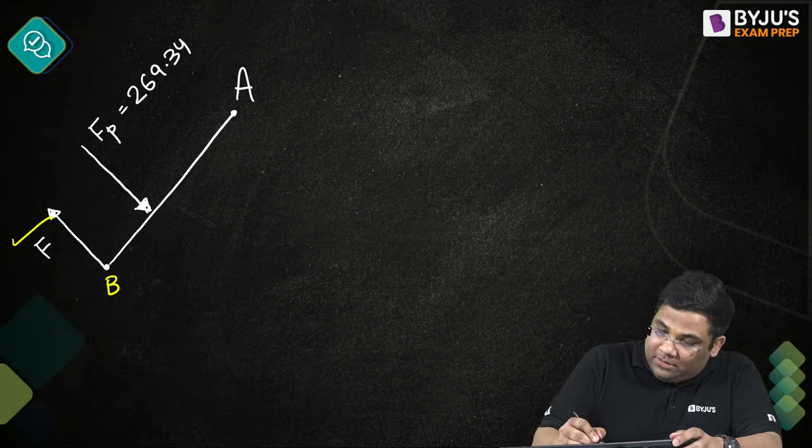Now see, this distance of B from A is how much? See, when I am finding the moment, I will take distance AB for moment. So I can say this F force will be having moment equal to F into AB. AB is 1.2 meter. Now, this FP force also will generate moment, that will be FP into this distance. Now, how to find out this distance?

You can find out, see. You see this, this is this distance, right? Very good. Now see carefully.

This is HP and this is 5 meters. Now I will take another triangle here, and another triangle here, you see.

People think GATE is easy. They will just solve sigma 1 minus sigma 2 by 2 to find the radius of Mohr circle, and feel that they have cracked GATE. That is not possible. Or suppose you just found out Froude number and feel that you have cracked GATE. Or you just found plasticity index, liquid limit minus plastic limit, or something like this.

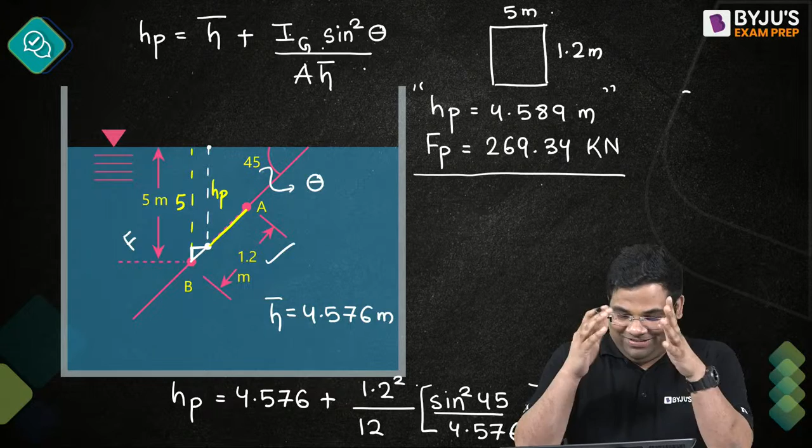That will not happen. If you don't solve questions like this, you will end up with 30 marks, 40 marks, and continue that cycle of giving gate every year. So you have to solve questions like this.

Yes, FP into this. Okay let us see this triangle. Let me take this point as Q, suppose this point as P. Now see this triangle, this is B, P, Q. Can you tell me what will be this BQ?

Yes, it is easy, right? Can I say this will be 5 minus your HP now? This BQ will be equal to 5 minus HP. HP is this one. Can I say it will be equal to 5 minus 4.589, that is 0.411 meter. Easy, yes, 0.411 meter I got.

Now from that, can I find out BP? This theta is equal to 45 degrees. So I can say sine 45 will be BQ by BP. So from here, BP will be equal to BQ by sine 45, that will be 0.411 into root 2, because sine 45 is 1 by root 2. So I will get a value of BP as 0.581.

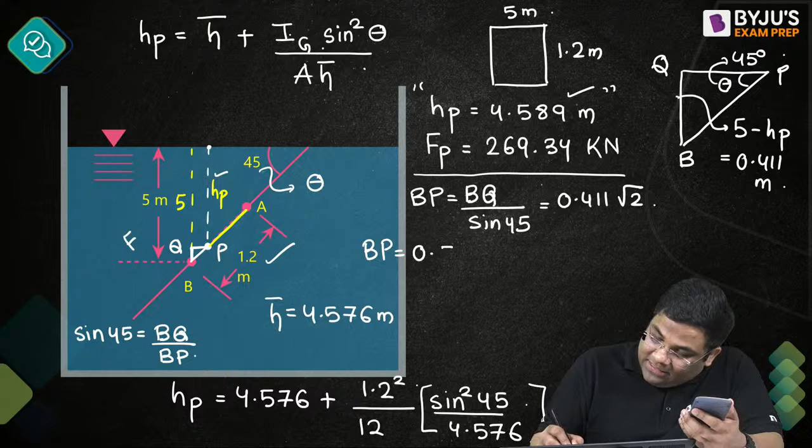If I get this as 0.581 meter, then what is this PA? Can I say it will be 1.2 minus 0.581? Am I getting this value? Are you all getting these values? Very good, 0.581, right? Let me just recheck the concept.

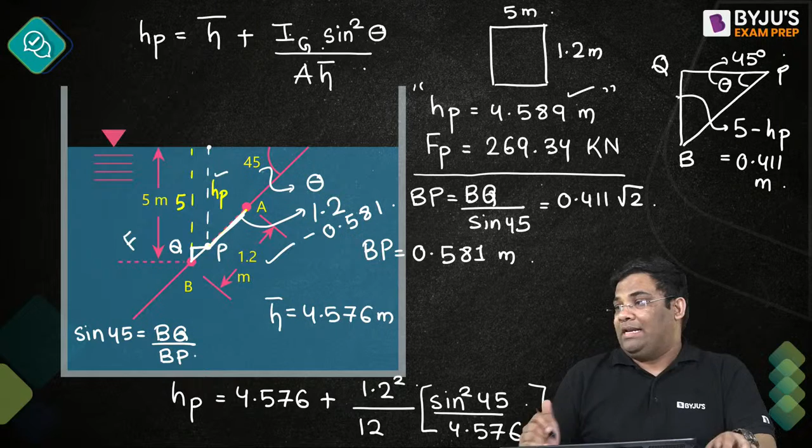5 minus HP, yes. I'm getting 0.581. So what value will I get for this AP? This AP, 1.2 minus 0.581, I'm getting a value of 0.619 meters. So I'll equate this.

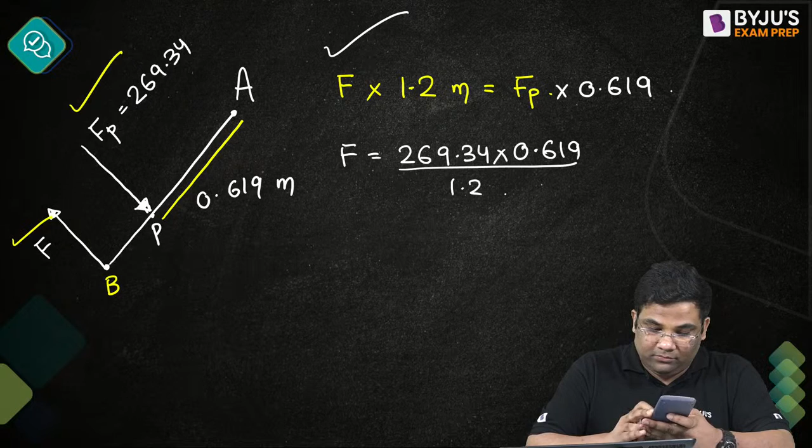Now I can solve this question and find out F. So F will be equal to 269.34 into 0.619 divided by 1.2. Let's solve this. I'm getting 138.9. Rishabh has found almost the closest answer, that means some calculation here and there. We are getting 138.93 kilonewton, or 138.70.

Understood everybody how we solve this question? Yes, so this type of questions you need to practice.

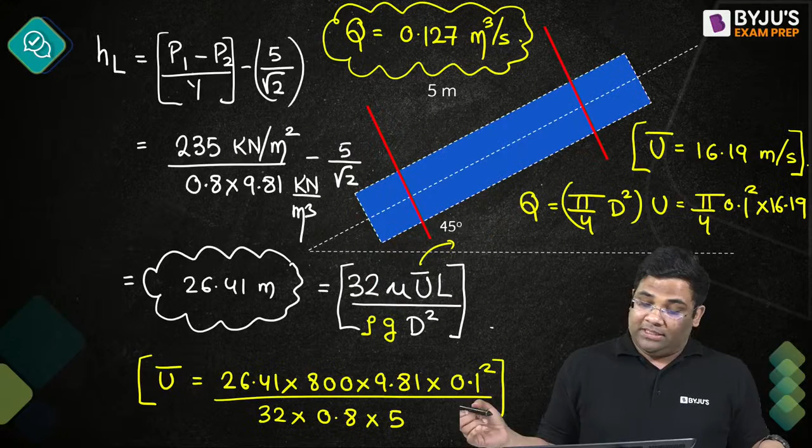This 2020 series was to make you aware of the level of questions which they can ask in the upcoming GATE examination 2023 or 24. They will be asking you questions like this. These are all 2-mark questions for your upcoming GATE examination.